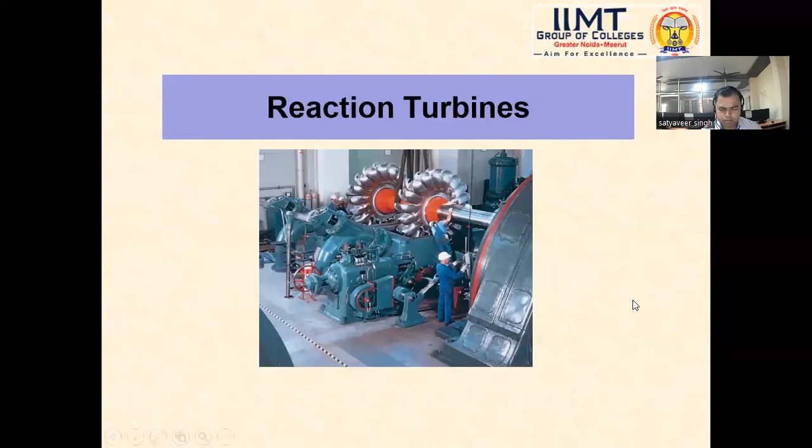So, the lecture topic is reaction turbine. Basically, what is a reaction turbine? We will talk about that and what is the basic requirement of this turbine.

In case of reaction turbine, water at the inlet of the turbine possesses kinetic energy as well as pressure energy. As water flows through the runner, a part of the pressure energy goes on changing into kinetic energy. Thus, the water in the runner is under pressure, and the runner is completely enclosed in an airtight casing. So, the casing and the runner are always full of water in case of the reaction turbine.

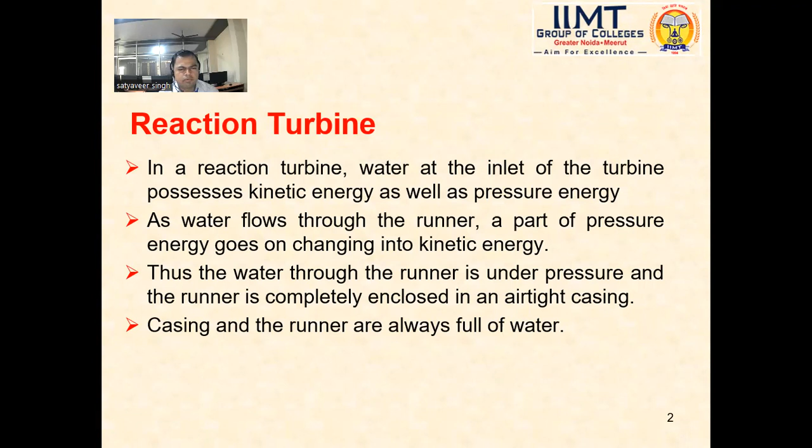Now, come to the next slide. In this slide, we can see this is a giant hydropower plant in which these are the blades of the turbine, and this is basically the shaft. So, this is the actual view of a large hydroelectric power plant.

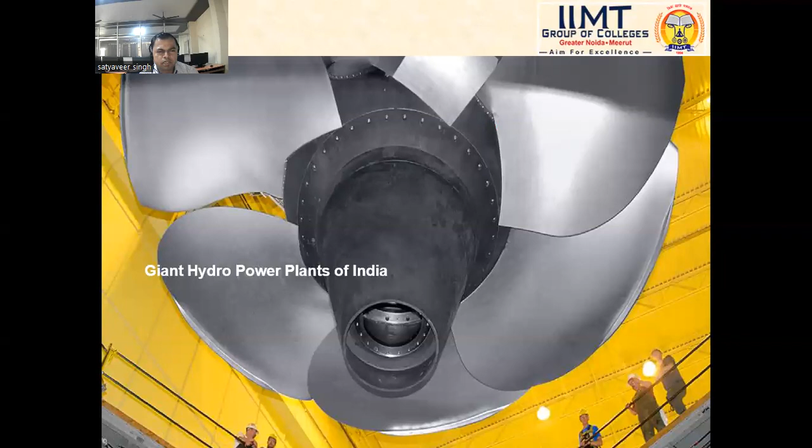If we discuss the types of turbines, different types of reaction turbines are there. Number one is inward flow radial reaction turbine, second is outward flow radial reaction turbine, third is mixed flow turbine, and fourth is axial flow turbine. We will discuss one by one.

In case of inward radial flow reaction turbine, water flows from outward to inward, but in case of outward radial flow reaction turbine, water flows from inward to outward. In mixed flow turbines, water flows radially but leaves axially. Francis turbine is the example of mixed flow. If we talk about the axial flow turbine, water enters and leaves axially.

Examples are Kaplan turbines and propeller turbines. These are two axial flow turbines. In case of Kaplan turbines, the runner blades are adjustable. So, in Kaplan turbine the reaction blades, that is runner blades, are adjustable, but in case of propeller turbine, runner blades are of fixed type.

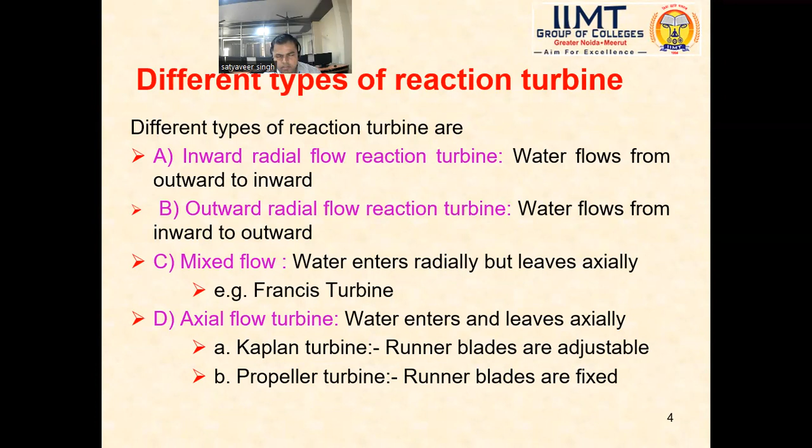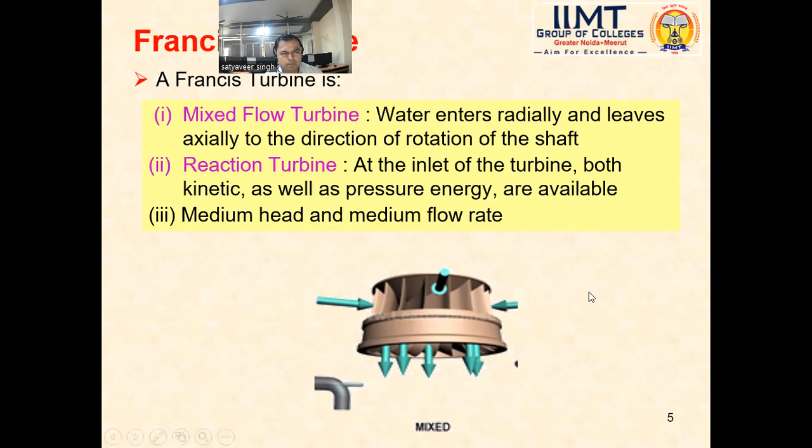Next is the classification of Francis turbines in more detail. Number one is the mixed flow turbine. In mixed flow turbine, water enters radially and leaves axially to the direction of rotation of the shaft. Reaction turbines, at the inlet, both kinetic energy and pressure energy are available, and it is of medium head and medium flow rate. This is the actual view of the mixed flow turbine.

Now, if we talk about the component parts of this type of turbine, this is the basic view, and a number of parts are there: penstock pipe, spiral casing, guide vanes, governor mechanism, runner, and draft tube. This is the exact figure, with the main shaft, the regulating rod, the guide vane mechanism, the runner blades, the draft tube, the tail race, and the scroll casing. So this is the exact picture of the reaction turbine.

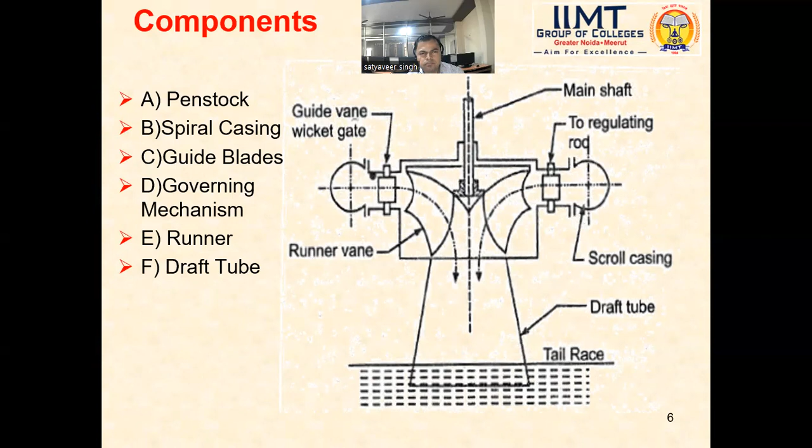Now come to the working principles of this turbine. There are a number of parts. First is the penstock. What is the function of penstock? A penstock is a large diameter conduit which carries water from the dam or reservoir to the turbine house. Since Francis turbine requires a larger volume of water than the Pelton wheel turbine, the size of the penstock is bigger in case of Francis turbine. The material used for the penstock pipe is generally steel.

If we talk about the spiral casing, water from the penstock enters into the spiral casing, which completely surrounds the runner. This casing is also known as scroll casing, or you can say this is the volute casing.

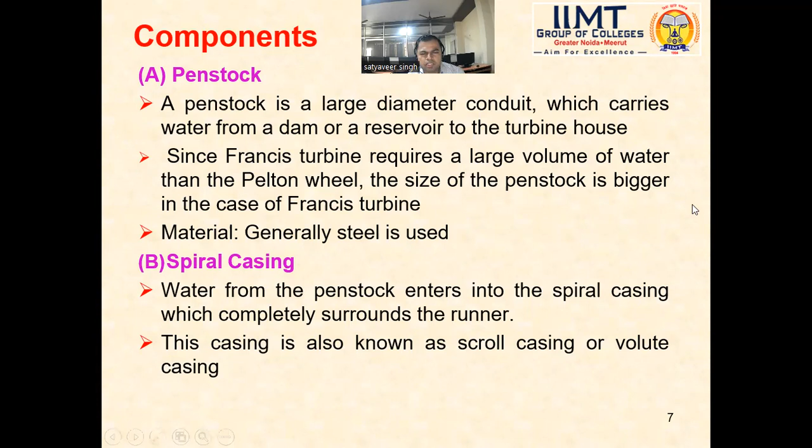We can say this is so because the rate of flow along the fluid path in the volute decreases due to the continuous entry of the fluid to the runner through the opening of the guide vanes.

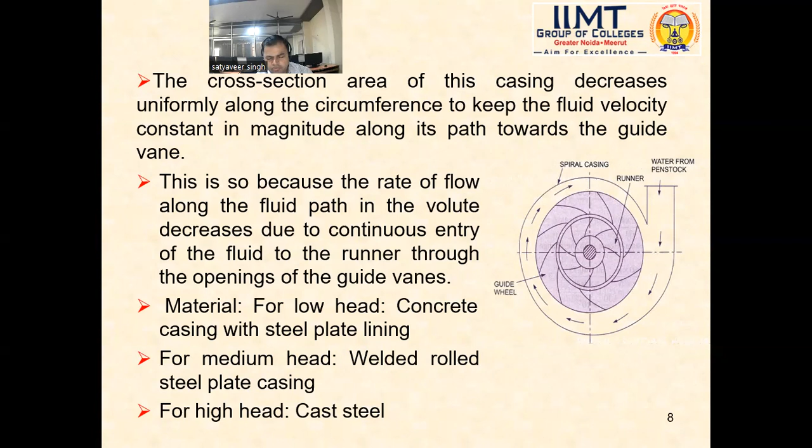As for material, for low head, concrete casing with a steel plate lining is required. For medium head, welded rolled steel plate casing is required. And for high head, cast steel plate casing is required.

Now the scenario is going to change. What is the guide vane mechanism? Basically, a series of airfoil shaped vanes called guide vanes or wicket gates are mounted on the casing. Guide vanes are fixed between two rings in the form of a wheel, and they can swing about their axis.

The basic purpose of the guide vanes is to convert a part of the pressure energy at entrance into kinetic energy, and direct the water or fluid onto the runner blade at an angle appropriate for the design.

Guide vanes or guide blades can move on their pivot center and hence change the area of flow. Depending on the load fluctuations, the governing mechanism changes the position of the guide blades, and hence the area of flow ensures the turbine rotates with a constant speed.

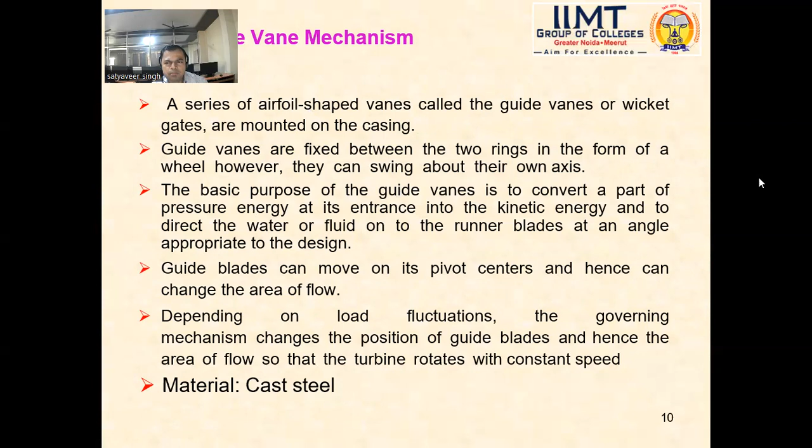Now, what is the function of the runner? It is the most important component of the Francis turbine. The runner consists of a series of curved vanes arranged along the circumference in the annular space between two plates.

The runner vanes are so shaped that water enters the runner radially at the outer periphery and leaves it axially at the inner periphery. Most of the pressure energy is converted into kinetic energy as water flows through the runner. The driving force on the runner is due to both impulse and reaction.

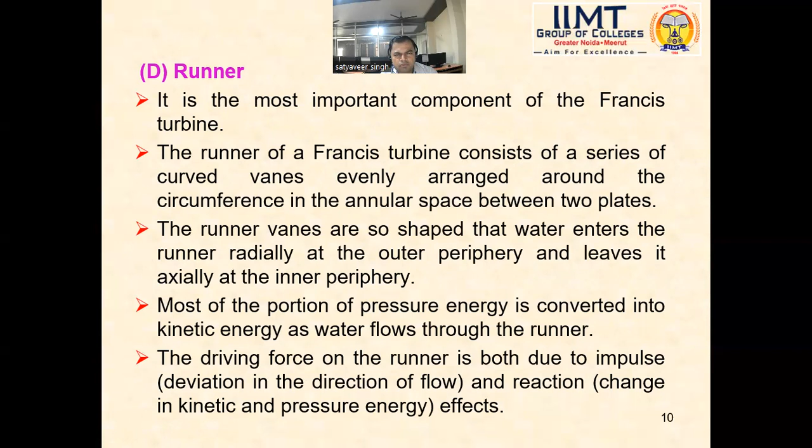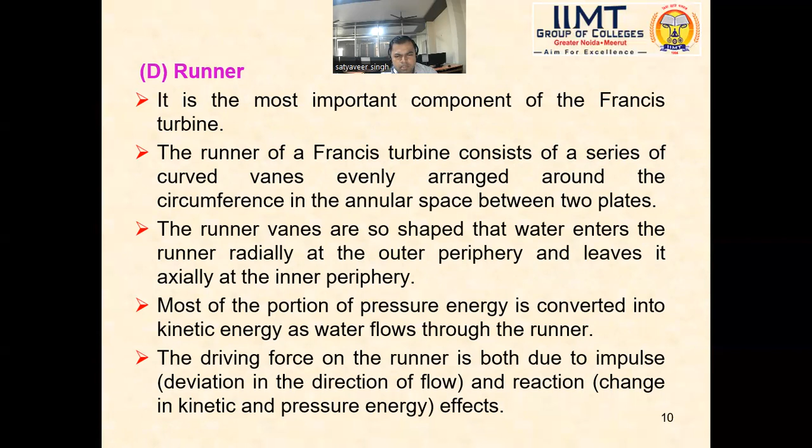What is impulse? Whenever a force is applied on an object for a very short time, impulse is said to occur. We can say that the driving force on the runner is both due to the impulse and the reaction effect of the turbine.

Now, what is the draft tube and its function? Basically, it is a pipe or passage of gradually increasing cross-sectional area towards its outlet end, and it connects the runner exit to the tail race.

As for the pressure of the reaction turbine, it decreases continuously as the water passes through the guide vanes and the runner. It goes below atmospheric pressure at the outlet of the runner, and the draft tube is used to discharge the water to the tail race by increasing the pressure above atmospheric.

The draft tube must be submerged below the level of water in the tail race. As for material requirement, it is basically a steel plate. So this is the function of the draft tube. We have a number of parts in reaction turbines, so we have to know the function of each part and which part is responsible for which function.

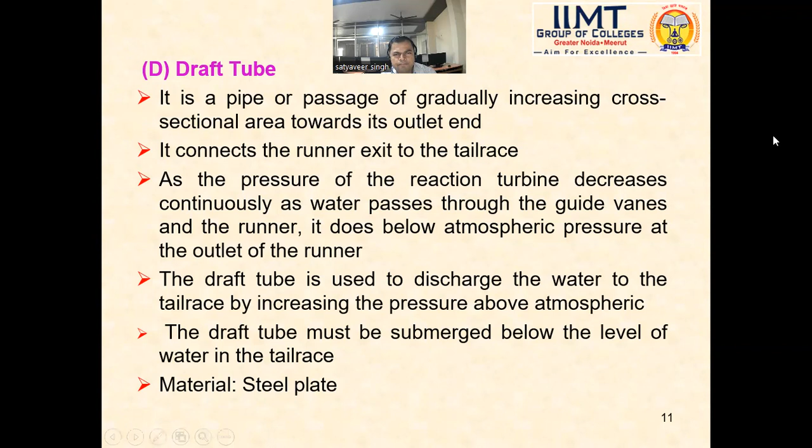Now come to the working principle of the Francis turbine. Water flows through the penstock under pressure and enters the spiral casing, which completely surrounds the runner. From the casing, water passes through a series of guide vanes which direct the water to the runner at a proper angle.

The pressure energy of the water reduces continuously as it passes over the guide vanes and moving vanes. The difference in pressure at the stationary guide vanes and moving vanes is responsible for the motion of the runner vanes. Finally, water is discharged to the tail race through the draft tube.

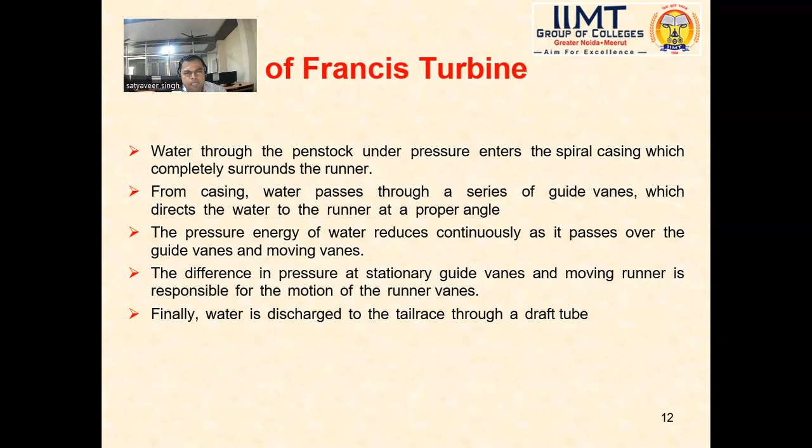Basically, if we talk about the velocity triangle, work done and efficiency of the turbines, how we can calculate. This figure shows the velocity triangle in case of Francis turbine.

In this case, we have the wheel part, the inner periphery, and the outer periphery. We can say that this is the center of the wheel, and R1 and R2 are the two radii. R1 is the outer radius, and R2 is the inner radius. So inner periphery is this, and this is the outer periphery.

These are the vanes, and in case of velocity triangle, this is the main vane, and there are two types of triangle concerned here: inlet velocity triangle and outlet velocity triangle. So this one is the inlet velocity triangle, and this is the outlet velocity triangle.

We can say that there are a number of parameters concerned. Here we have U2 and VW2, velocity of whirl at section 2, and VW1 is the velocity of whirl at section 1. This is the angle concerned. V1 is the absolute velocity at inlet, and V2 is the absolute velocity at outlet. VR1 is relative velocity at inlet, and VR2 is relative velocity at outlet. Similarly, we have two velocities, U1 and U2, the tangential velocity at section 1 and 2 respectively.

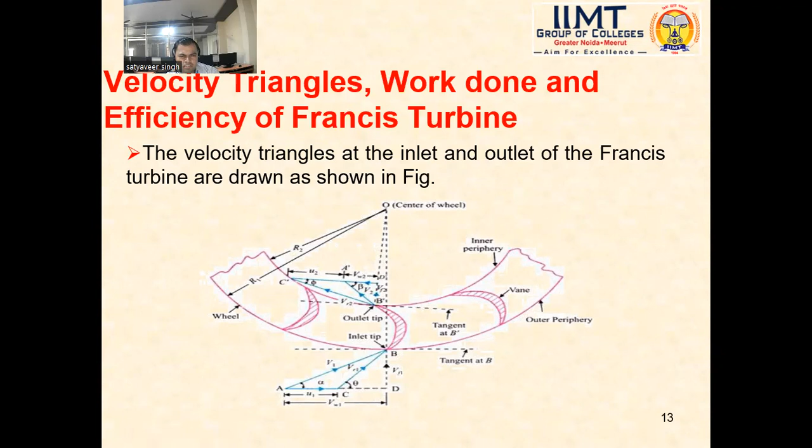For maximum output, the runner of the Francis turbine is designed so there occurs a radial discharge at the outlet tip of the blade. This type of turbine is basically a reaction turbine, different from the impulse turbine. The Pelton wheel is an impulse turbine, while reaction turbines include the Kaplan turbine, Francis turbine, and propeller turbine. These are other examples of turbines similar to the Francis turbine.

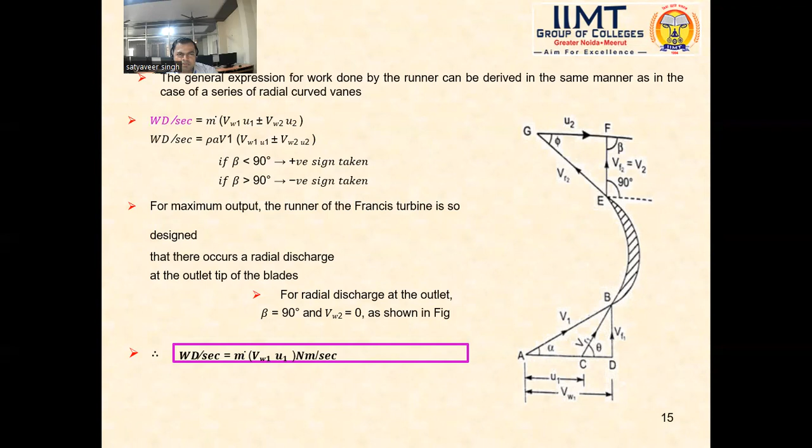Now the hydraulic efficiency formula should be clear: it is the ratio of runner power to water power. So we calculate runner power first, then water power, and from these we can easily calculate hydraulic efficiency. The runner power is m dot VW1 U1, divided by the water power, which is rho g Q H.